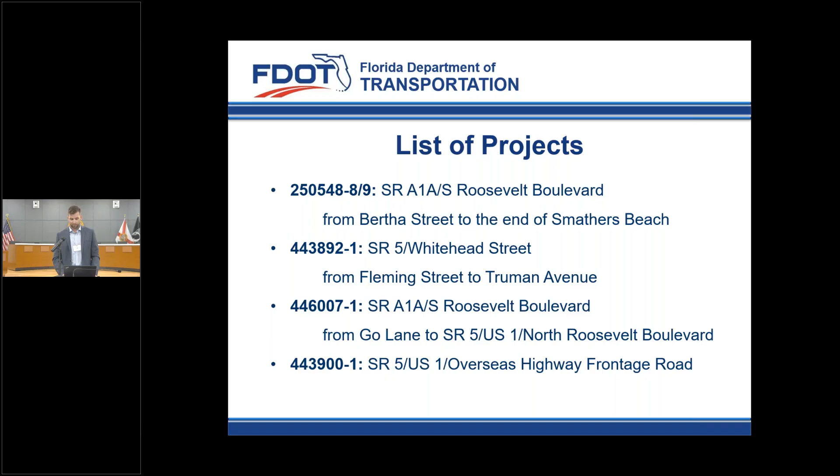The next project is South Roosevelt Boulevard, over there by the triangle, from Go Lane to North Roosevelt Boulevard, State Road 5, US 1. And lastly, the project a bit further away, that's the frontage road along US 1. That'll be the last project that we review tonight.

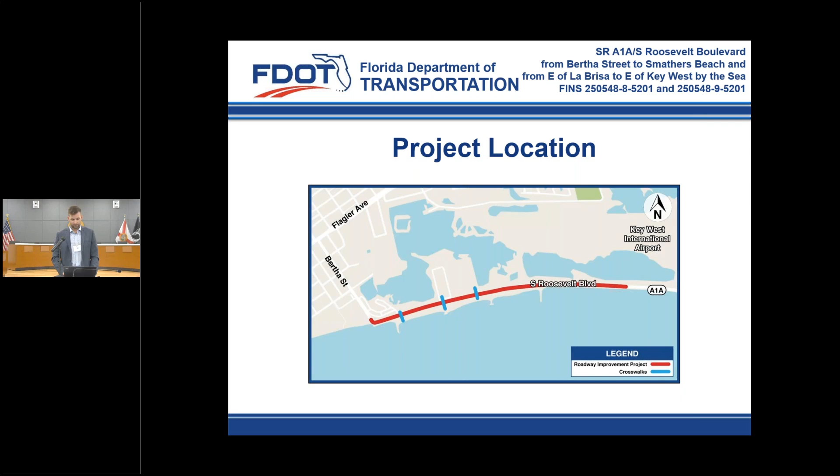So this is South Roosevelt, a large majority of this contract, which shares the same 800-day schedule because it is a large majority of the contract - the same spring 2025 date, and approximately $23.3 million.

It's important to note that we did develop this in coordination - it was really an effort led by the City of Key West through a LAP project, but they worked hand in hand with our team in design to bring you this project. So we thank you for that, City of Key West. It's important to note that this is a resiliency project. We are raising the road up to 17.5 inches in a couple of locations, but overall we're providing significant improvement to the drainage, which I'm sure you've seen throughout the project corridor. And again, the schedule may change, but we're trying to wrap this up in 800 days.

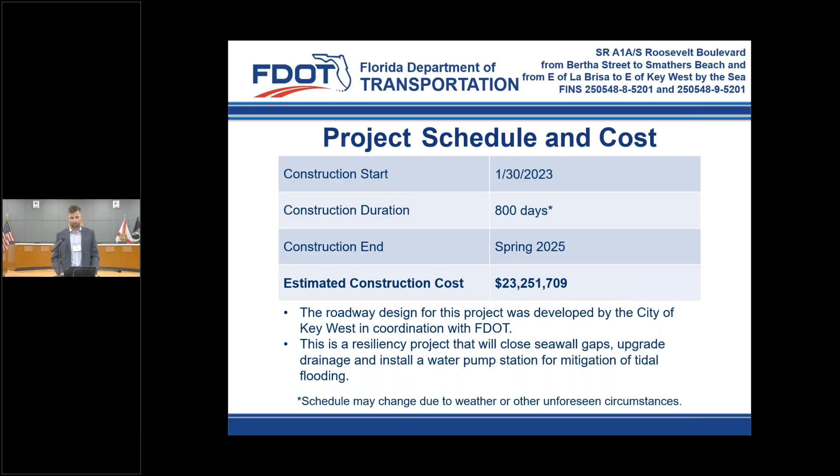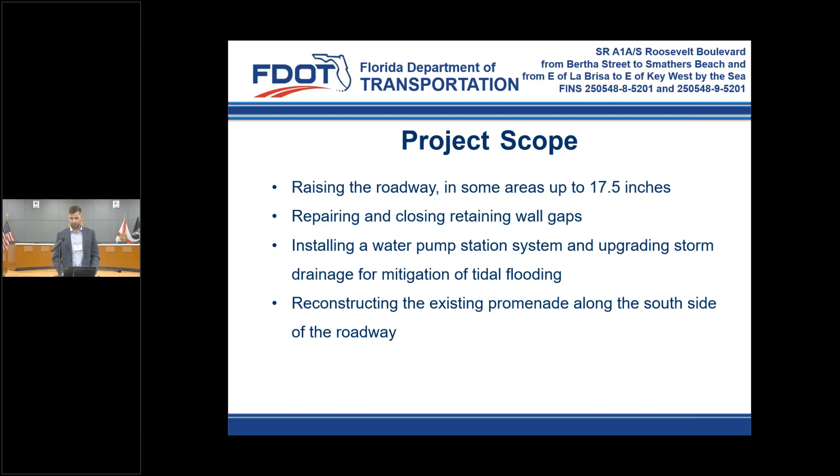So as I said, the project scope includes raising the roadway in some areas up to 17.5 inches, repairing and closing retaining wall gaps, a large portion there by Bertha Street. There was also some hurricane damage that will be taken care of, included in this contract. Another large portion addressing the drainage concerns is the water pump station and upgrading storm drainage for mitigation of tidal flooding. We're also reconstructing the existing promenade along the south side of the roadway, adding sidewalk on the north side of the roadway and upgrading curb ramps.

And as I said, installing 3 pedestrian crosswalks with pedestrian hybrid beacons, also known as the HAWK systems - those are the systems that we have recently installed on North Roosevelt. Of course, we'll be repaving and restriping the roadway and installing new signage and pavement markings.

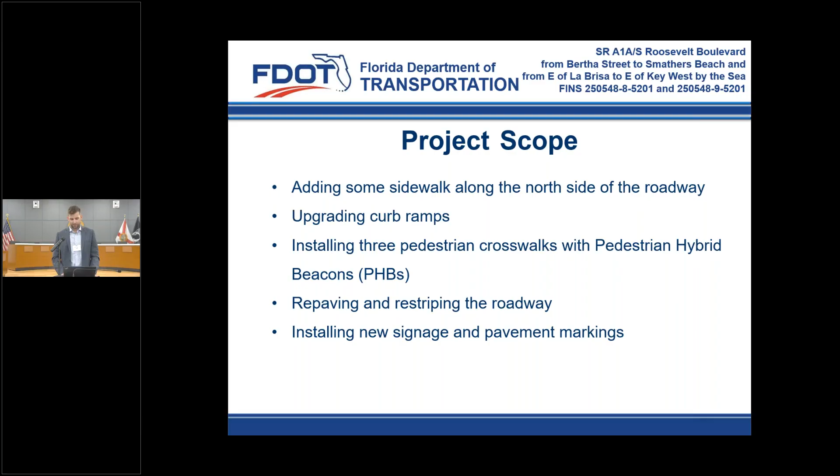A lot of you may have seen this board in the back here, which we can go over with you individually or as a group. But for those of you online, this is one of the slides, just making sure I didn't skip one.

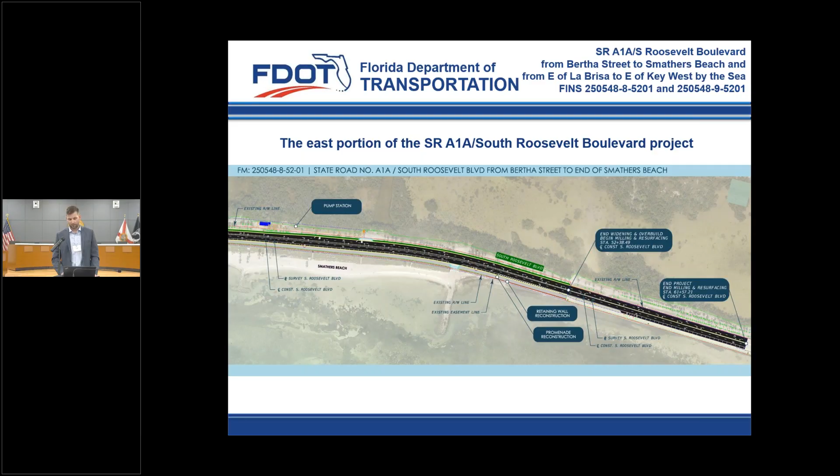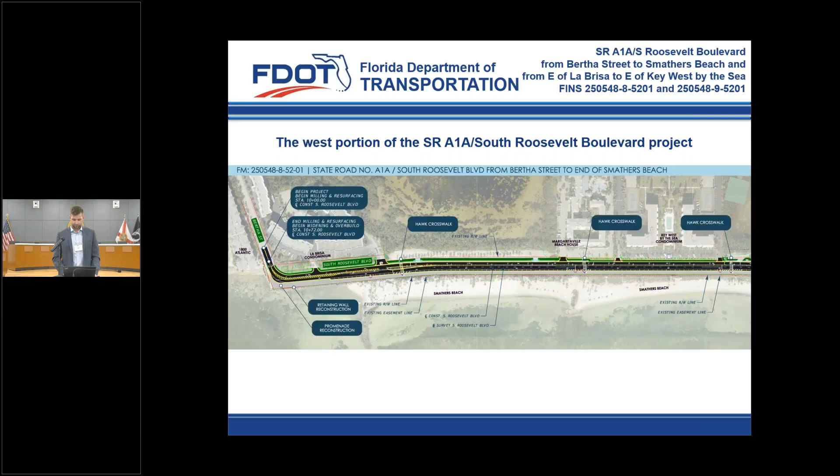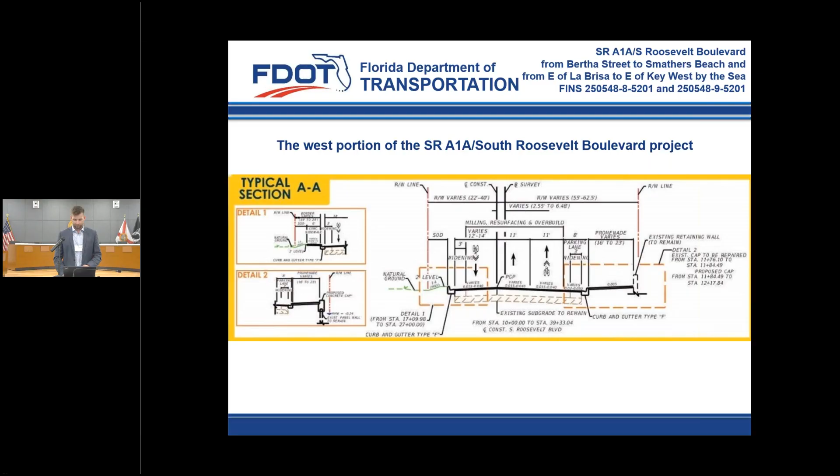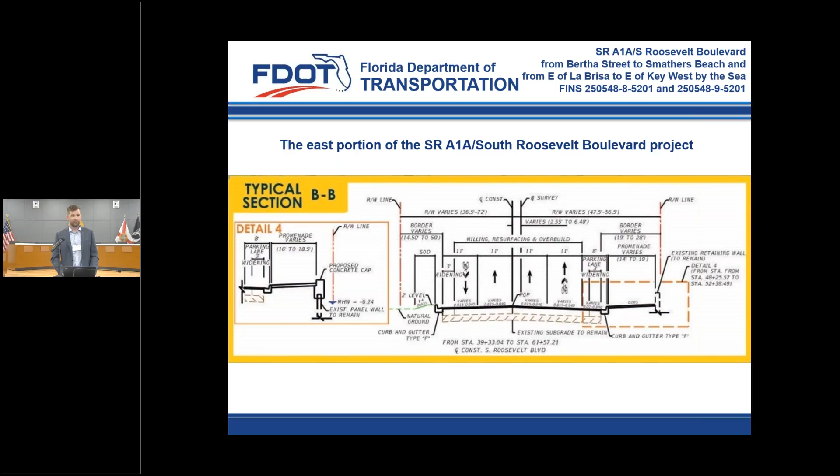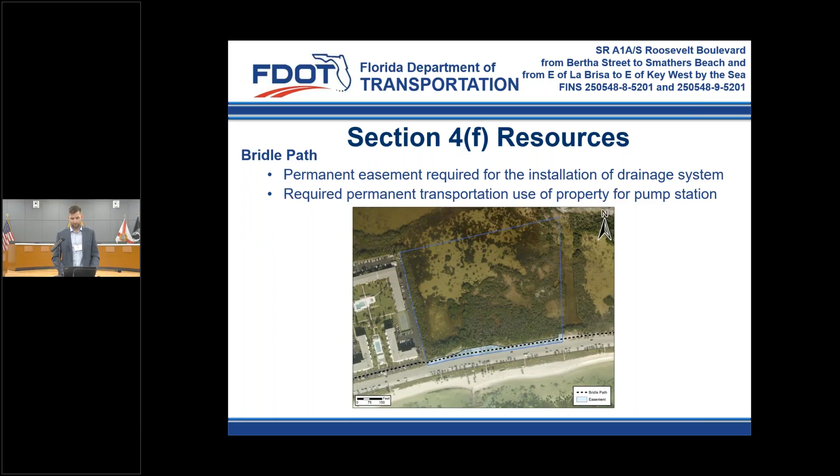The portion of the bridle path will be temporarily closed during construction. However, once complete, the new installed drainage system will not interfere with the use of the bridle path. Section 4(f) is kind of a technical terminology, but a de minimis finding is anticipated - that's a minimum requirement where a project would result in a take or use from a section 4(f) property.

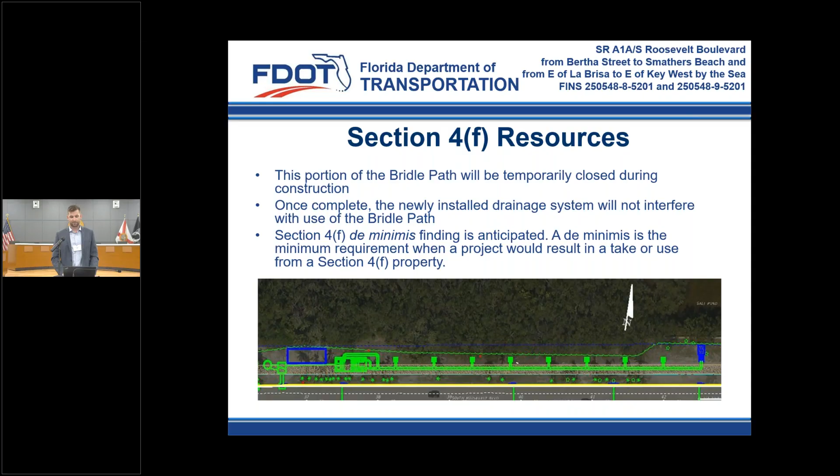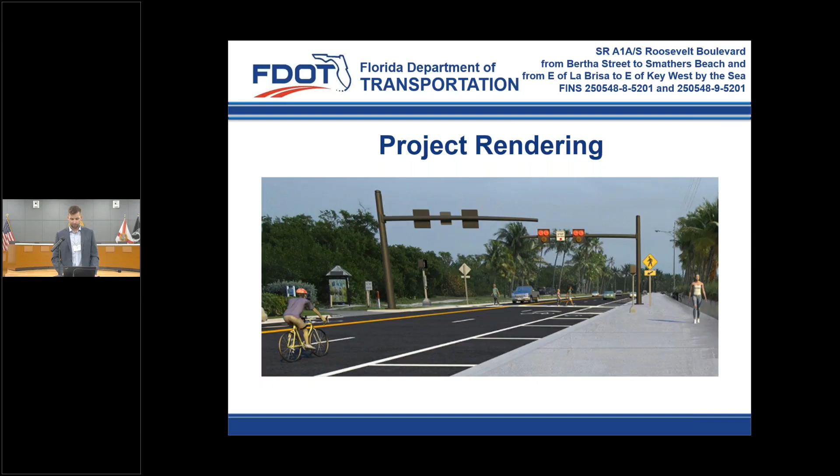Maintenance of traffic is always an important aspect of our construction projects. There are no detours anticipated, but traffic will be reduced to 1 lane in each direction, so 2-lane, 2-way during construction. It's important to note that access to adjacent residences and businesses will be maintained at all times, however that configuration might be a little bit different than what you're used to.

Any additional lane closures will be during non-peak hours, from 9 a.m. to 4 p.m. Monday through Friday, and 9:30 p.m. to 5 a.m. Sunday through Thursday, and that's on non-event days and nights.

All right, back in action.

Apologies for everyone here. So, maintenance of traffic - this shows the two-way, one lane in, one lane out. This represents the first phase of construction where we're reconstructing the south side of South Roosevelt.

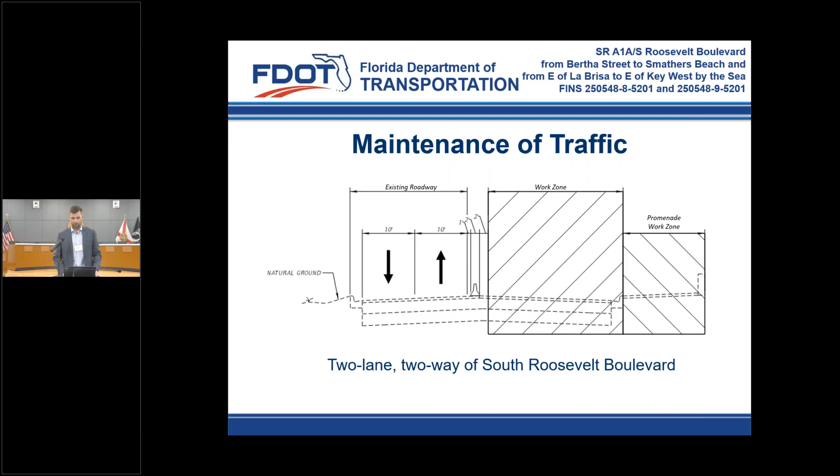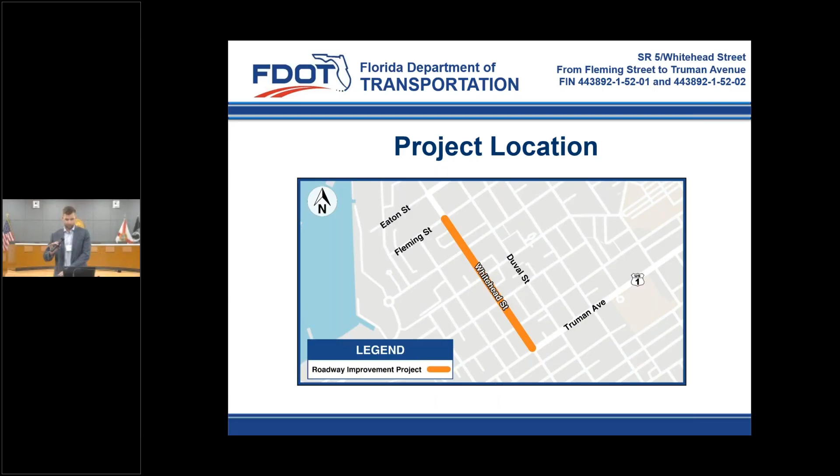And then if I go to this side, it shares the same construction start date, but the duration is different. Typically we wouldn't do that because this is one contract, so really the contract time is 180 days, but giving us that confidence is the incentive on this project specifically.

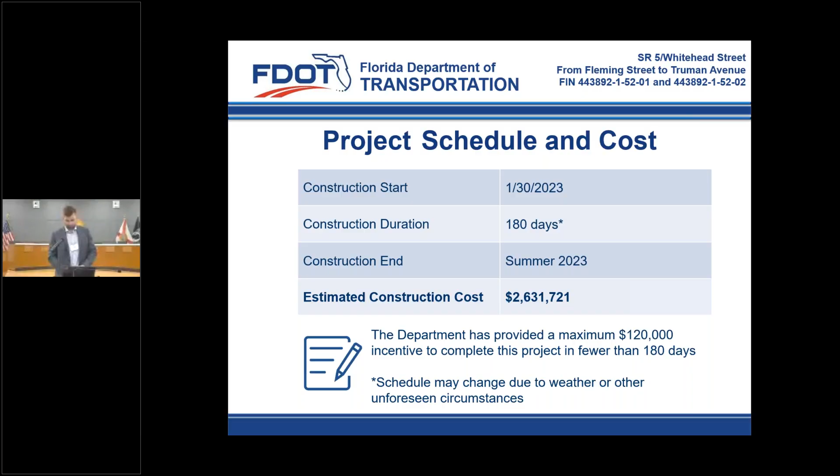So we're incentivizing the contractor up to a maximum of 120,000 to construct the project, start that on the first day of construction, and get out of the way in 180 days. That would bring us to summer 2023, and the estimated construction cost is about $2.6 million.

The project scope of Whitehead, which is represented by the arrows here on those boards, includes replacing damaged sidewalks, repaving and pavement reconstruction, upgrading pedestrian signals, detectors, and ramps, as well as repairing and upgrading the existing lighting to LEDs, light emitting diodes. We're also updating signage along the corridor and restriping the roadway.

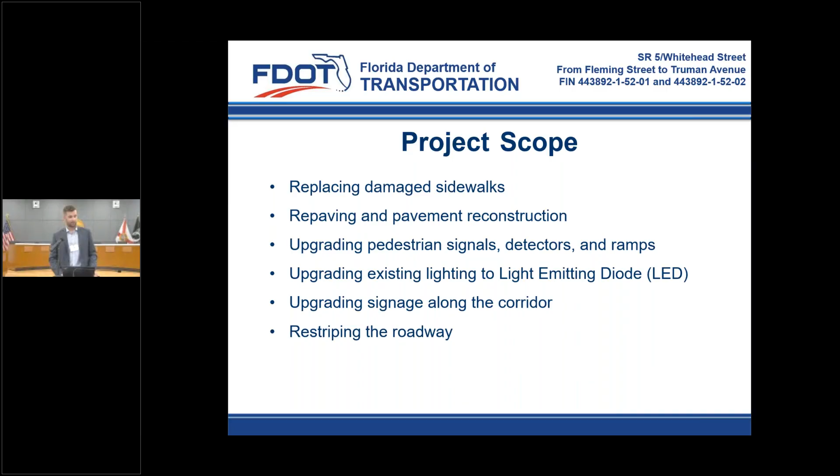And then for the benefit of those online, this is very similar, if not the same, as the boards that we have here in person - just a graphical and aerial overview of the improvements of Whitehead Street.

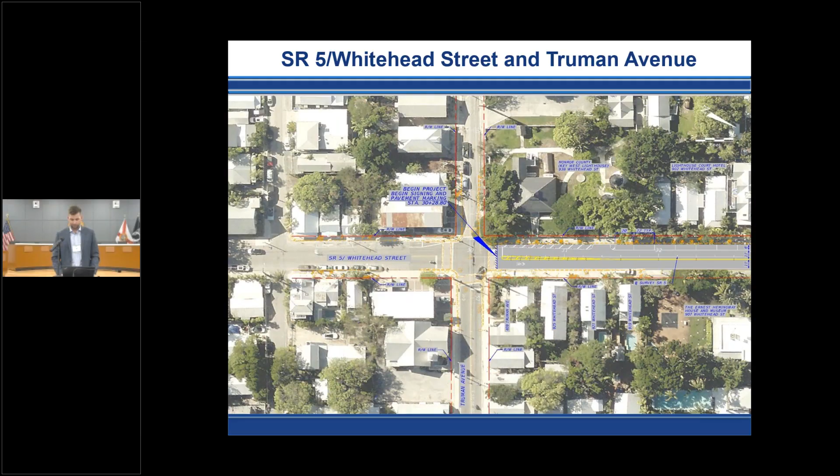Also beginning at Truman Ave and working our way north. High emphasis crosswalks here at the intersection are a major improvement - currently we don't have those. There are areas, especially at the intersections, where there's deficient pavement that we're going to get in there, rework the base, and reconstruct with solid material.

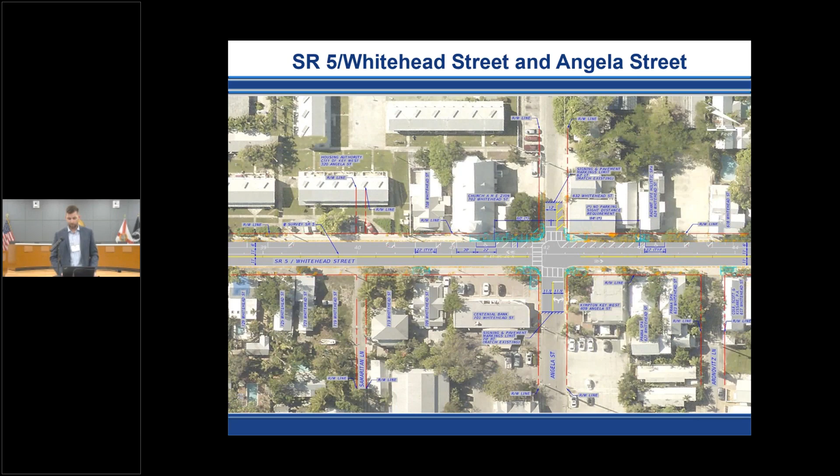Work will take place during the daytime, 8 a.m. to 8 p.m., Monday through Friday. Daytime closures of Whitehead Street in both directions are anticipated, limited to one block at a time. The intent is to get in there, get all the work done efficiently and effectively, and minimize the impacts to Whitehead Street, travelers, and businesses along the corridor.

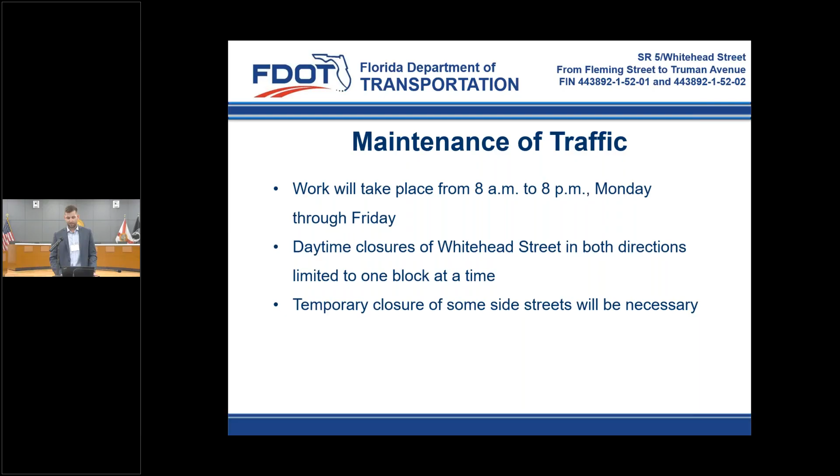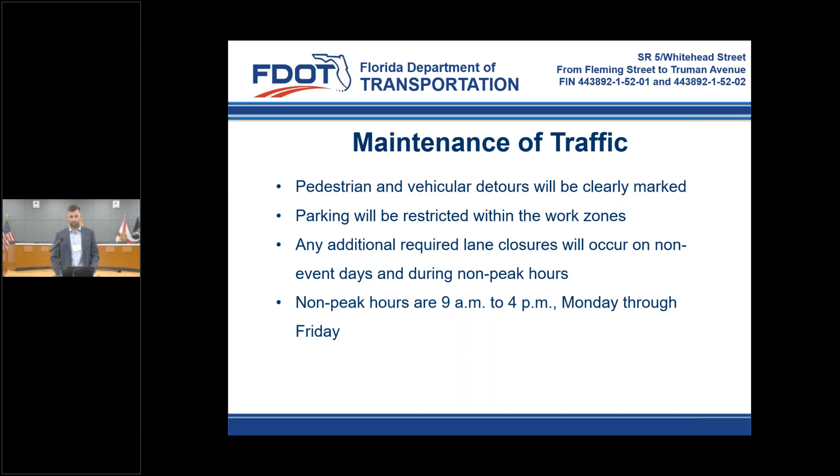At that time, temporary closure of some side streets will be necessary. Pedestrian and vehicular detours will be clearly marked. Parking will be restricted within the work zone. Any additional required lane closures will occur on non-event days and during non-peak hours, which is always an important aspect of our construction projects, especially down here. Non-peak hours for this project are 9 a.m. to 4 p.m., Monday through Friday.

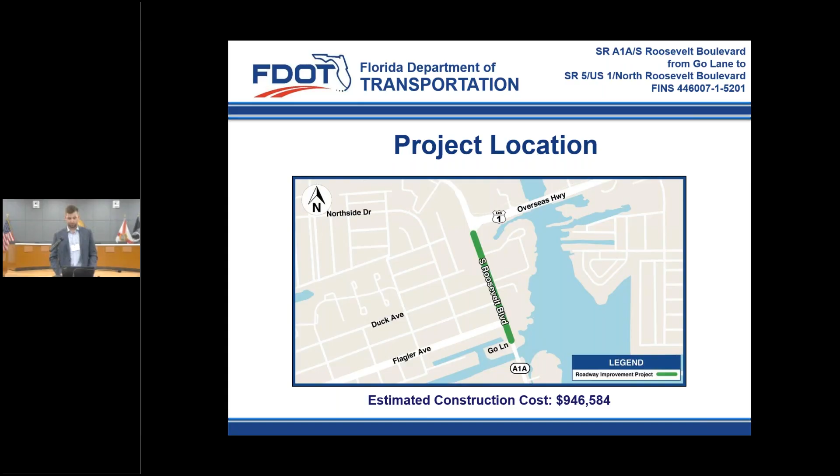The last project in this area is the South Roosevelt portion over by the triangle, much smaller from the overall contract, about $1 million. The limits go from Go Lane to the triangle, with a much smaller scope for repaving and restriping the roadway, upgrading signage, pavement markings, and curb ramps.

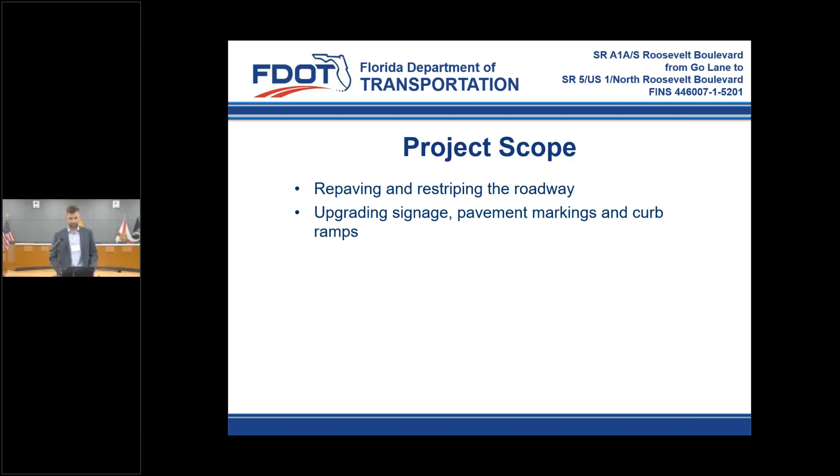Also for this project, no vehicular detours are anticipated. Any lane closures, again, on non-event days, nights and weekends. Non-peak hours are 9 a.m. to 3:30 p.m. and 9:30 p.m. to 5:30 a.m., Monday through Thursday. Access to residences and businesses will remain open throughout construction.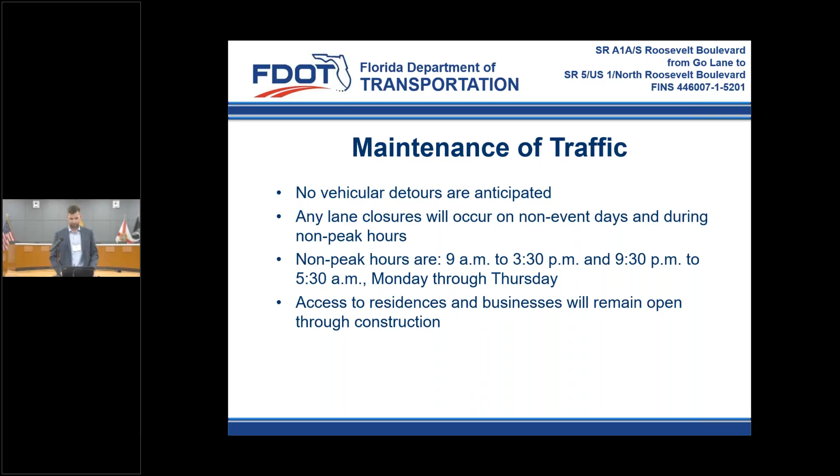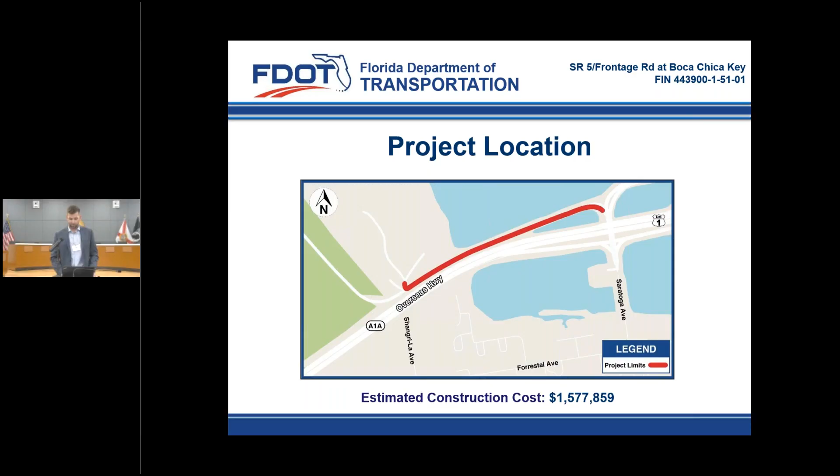The last project is about $1.6 million, and this is on the frontage road along US 1, so really no impact to US 1 traffic, but certainly if there are any residents here tonight, they would be interested in this project. The project scope includes widening, repaving, and restriping the roadway, restoring the paved and unpaved shoulders, repairing front slopes along the north side of the roadway, including mangrove restoration, and upgrading all signage and pavement markings.

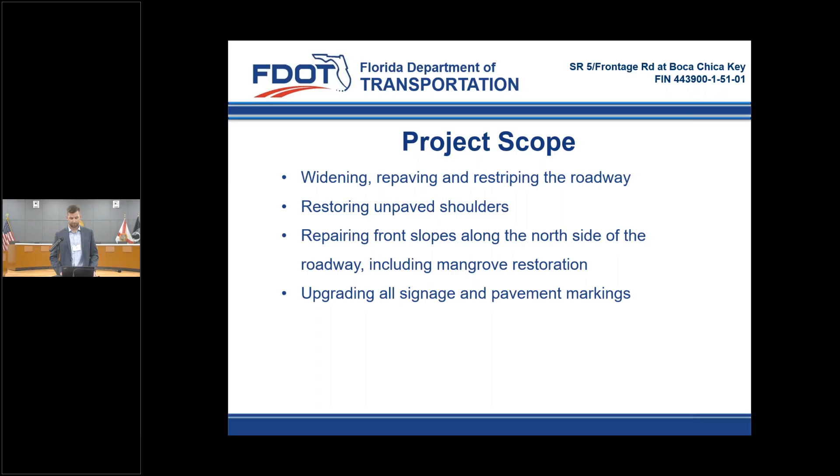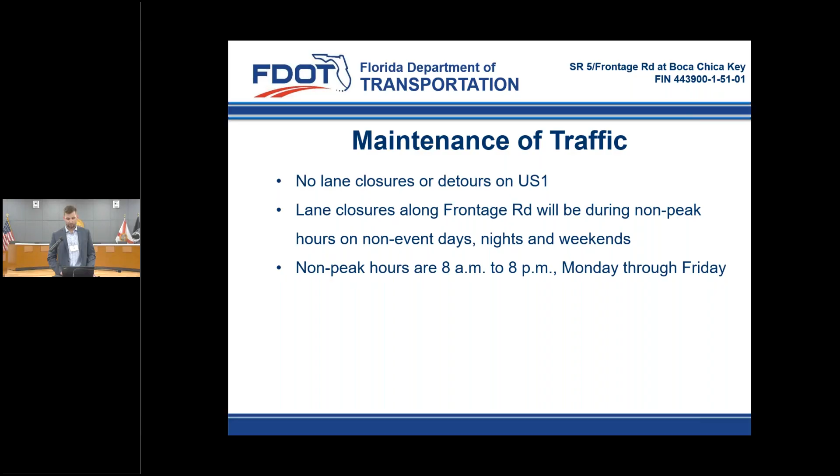So for this one, the maintenance of traffic again involves no lane closures or detours on US 1. Lane closures along the frontage will occur during non-peak hours on non-event days, nights, and weekends, and those non-peak hours are 8 a.m. to 8 p.m., Monday through Friday. So daytime work only there. And with that, I will turn it back over to Julie.